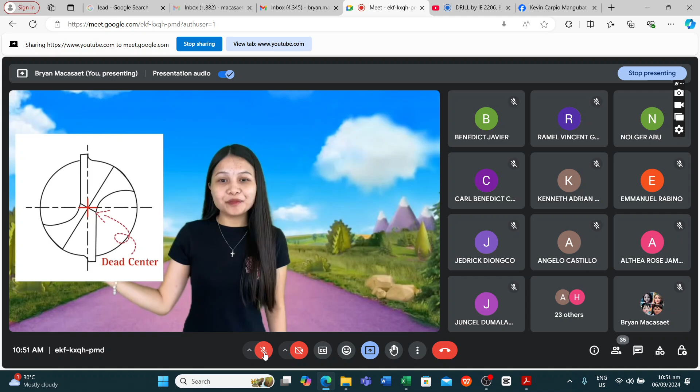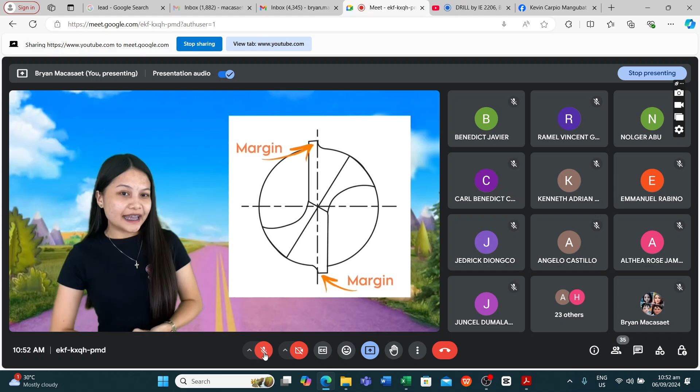The dead center is the sharp tip edge at the end of the drill, always at the center. The point is the entire cone-shaped cutting surface. The heel is behind the cutting edge, and the lip clearance angle is behind the lips. However, the margin is a narrow strip along the flutes, ensuring the right hole size, while the body clearance is slightly smaller than the margin, reducing friction with the hole walls.

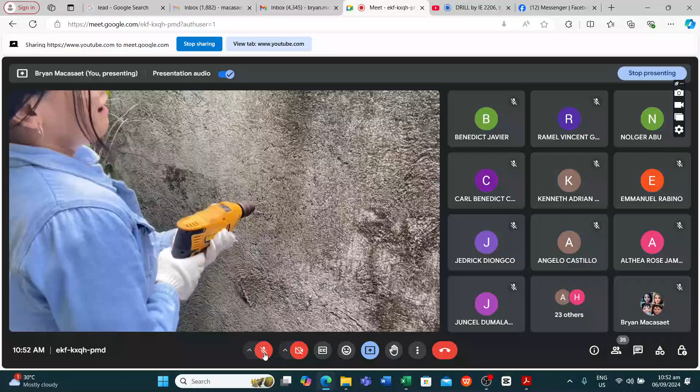Note that before a drill is used on any kind of work, it is important that it be correctly ground and sharpened. If a drill is not in proper condition for work, it will drill with difficulty, make a hole that is rough or off size, and perhaps break while in use.

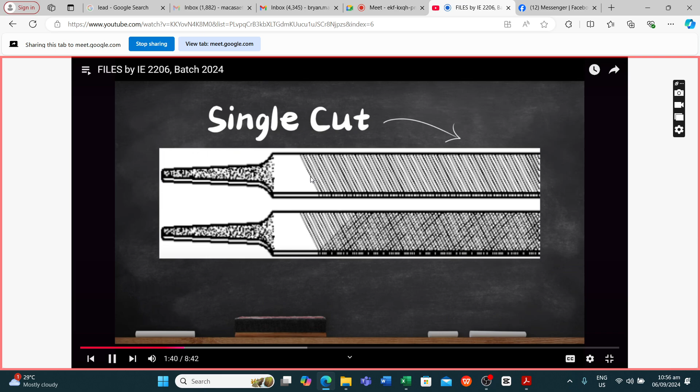Files have either single cut or double cut teeth. Single cut files have rows of teeth cut parallel to each other. The teeth are set at an angle of about 65 degrees with the center line. This is also used for sharpening tools, finish filing, and draw filing.

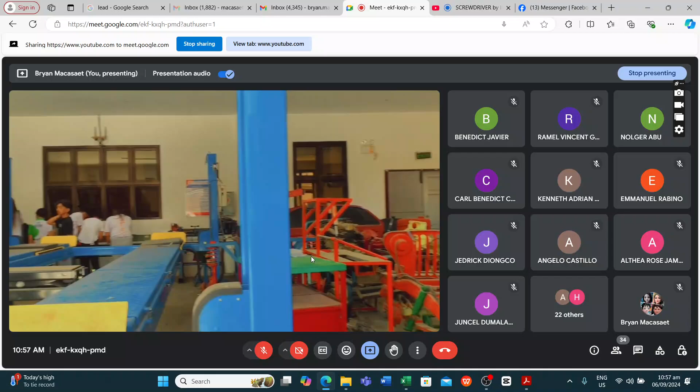Are you guys ready? Because we are now about to embark on a journey through the fascinating world of screwdrivers. Before we delve into their unique traits, let us first understand the parts of a screwdriver.

The body is the main handle of the screwdriver, providing grip and control during use. It's typically crafted from sturdy materials like plastics, rubber, or metals for durability and comfort.

Next, we have the shank, a long slender shaft that extends from the body to the tip. The shank comes in various lengths and diameters to accommodate different screw sizes and applications. Lastly, we have the tip, the business end of the screwdriver responsible for engaging with the screw head. The tip can vary in shape and size depending on the screw type it's designed to work with.

Now that we understand the components of a screwdriver, let us explore the four main types and their unique attributes, starting with the timeless classic, the standard screwdriver.

First up, we have the standard screwdriver, a timeless classic that's been a staple in toolboxes for generations. With its flat slotted tip, the standard screwdriver is perfect for driving screws with a single slot or groove. Whether you're assembling furniture or performing a basic repair, the standard screwdriver is always ready to lend you a hand.

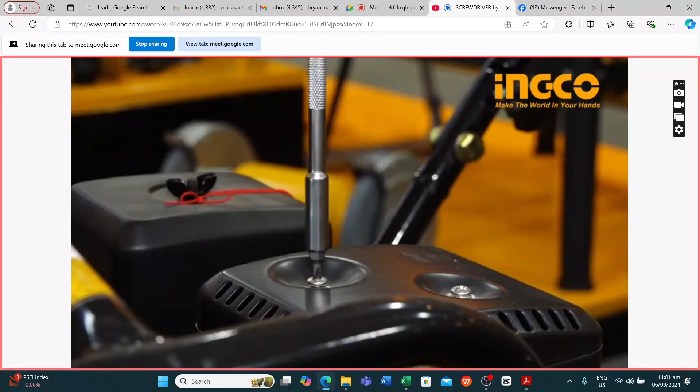Last but not least, we have the ratchet screwdriver, a hand tool that combines the convenience of a screwdriver with the efficiency of a ratcheting mechanism. It is used to drive or remove small screws rapidly. With its reversible ratchet action, the ratchet screwdriver enables you to tighten or loosen screws with minimal effort, making it ideal for repetitive tasks and tight spaces, and it's a useful tool for mechanical work and home repairs.

And there you have it, the four, each with its own unique features and benefits. So whether you are a professional or a DIY enthusiast, understanding the different types of screwdrivers and their components helps you choose the right tool for every job.

Okay, so that is the additional input for screwdrivers. From the video presentation, it shows, explains, and describes what is a flat or standard screwdriver, the Phillips screwdriver, the offset screwdriver, and the ratchet screwdriver. Okay, so next we have another presentation for shears.

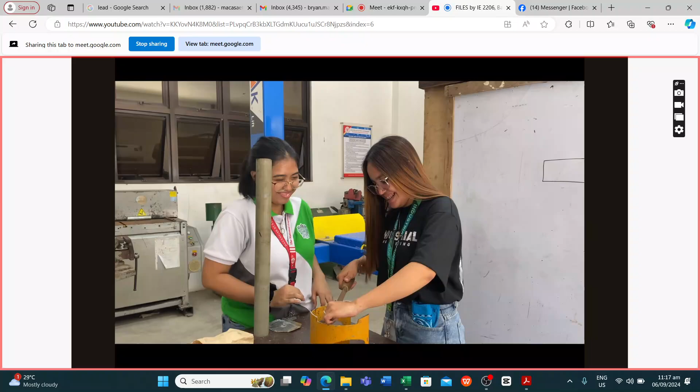Okay, so that is files. May mga part kasi na mute doon sa mga sound effects na ginamit nila. At kapag in-upload sa YouTube, yung mga copyrighted background music at saka songs ay natatanggal.

Okay, so can I call Ron Kilio Jake for the evaluation of the video presentation? Jake, Ron Kilio. Nasa si Jake? Wala.

Okay, next we have Relativo, John Lester. Evaluation of the video presentation.

Pakilaksan ng boses. Lester? Rinig po ba, sir? Yeah, sige. Okay.

Wait lang po, sir. Ano nga pong tanong niyo po, sir? Evaluation of the video presentation.

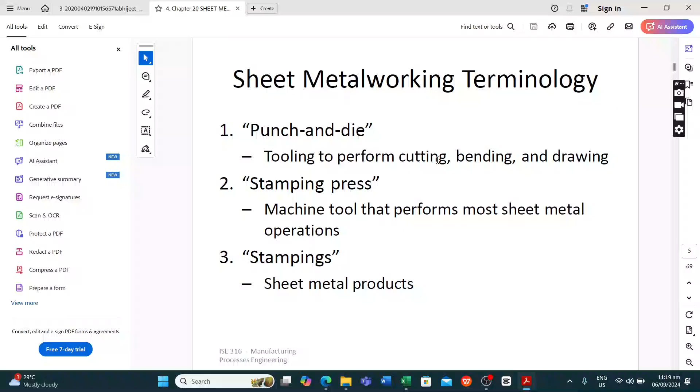Sa files po nga, ano? May iba't ibang difference po ng files. May square file, triangle, round file, knife file, flat triangular file.

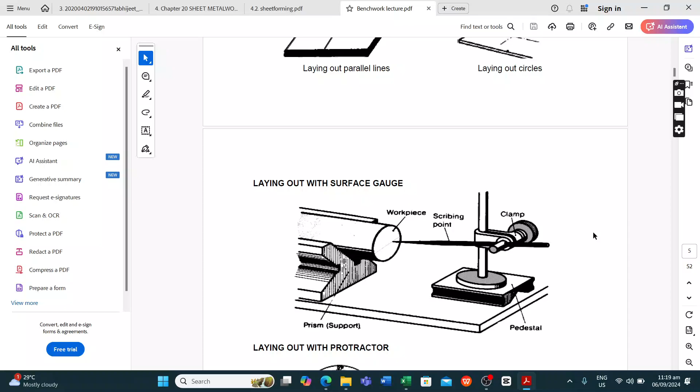Okay, so and then ano pang pinakita doon? Tsaka yung kung paano po siya gamitin. Ang paghawak po is dulo sa dulo, tsaka 30 to 40 lang po ang kailangan dito. Okay, so thank you.

Tama si Mr. John Lester. And then I'll be showing you an additional input.

So kanina na-presenta naman tong mga to. Tingnan ko lang kung minalikdangan ako. So lahat ng pine-present is part of a bench work. Pag sinabi nating bench work, it is a type of activity na ginagawa in a bench, and then it refers to a job that is completed at a stationary setting.

And then meron tayong carpentry and then hand tool. Idagdag ko lang yung safety, hindi natin na-discuss kanina. So when we work with shop, we must always recognize and be aware on the do's and don'ts na kailangan natin gawin at hindi kailangan gawin sa loob ng shop. Una, recognize safe and unsafe work practices in a shop.

Wala ba yung presentation? Ayan. So ibig sabihin, kapag alam natin na tayo ay pwedeng mapahamak, huwag natin gagawin. Second, perform your job in a manner that is safe for you and other workers and develop safe work habits. Develop responsibility for personal safety and safety of fellow workers. Think safely and work safely at all times.

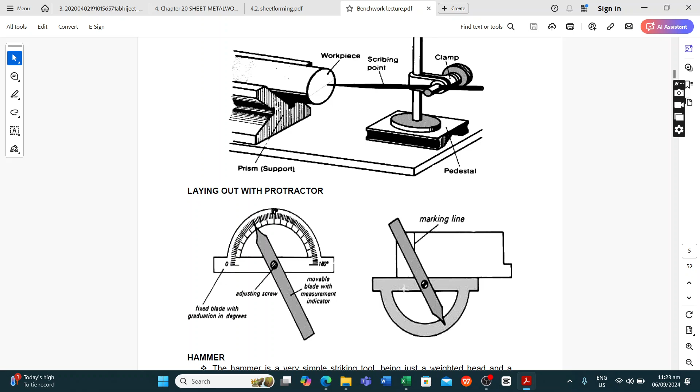Ito, na-discuss na naman natin to, yung mga laying out tools, etc. So tapos na tayo dyan. Yung procedures, napakita na rin naman sa video presentations yung iba. And then, hammer. Na-discuss na rin yan, yung mga types ng hammer, ball peen, straight peen, cross peen, claw hammer, sledges, and then, punches.

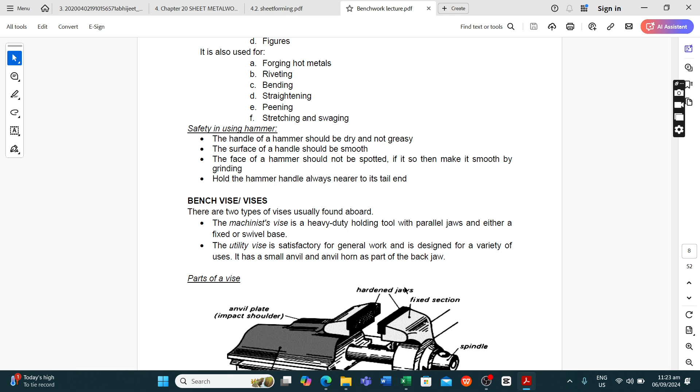Bench vise, hindi pa. So later on, edi papakita clamps, wala pa rin. Screwdrivers, tapos na tayo. So we have the standard, we have the offset, we have the Phillips and the ratchet.

Punches, ito yung diniscuss kanina. So it is a tool for stamping, perforating. Meron tayong center punch, and then meron tayong prick punch. We also have the starting punches, pin punches, aligning, and hollow shank.

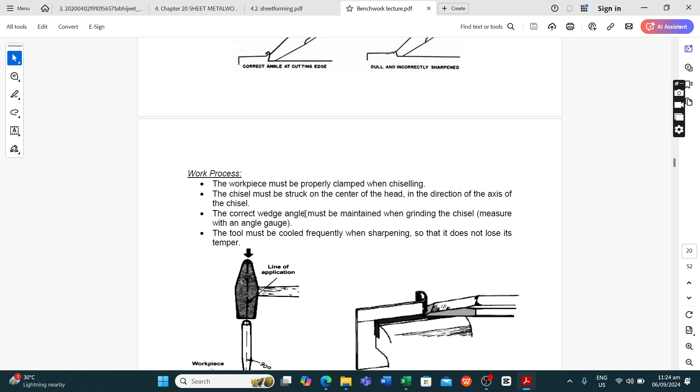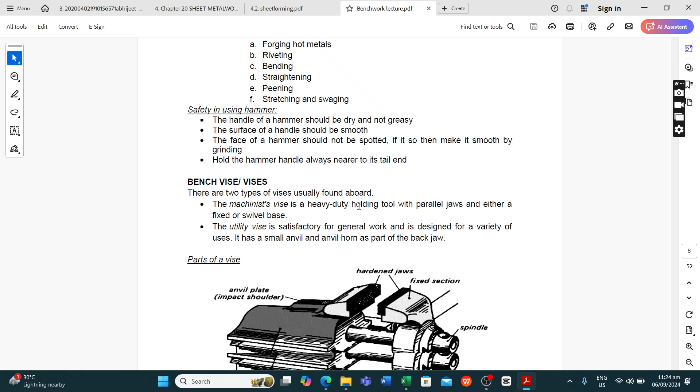Hacksaw, yan. Papakita ko muna and then mamaya ko i-discuss. We also have chisels, okay? Napakita na din sa video yung chisels. Okay, so next. Ang hindi ko pa na-discuss ay, after ng hammer, ay bench vise. Okay? So may video ba tayo sa bench vise? Okay, let's see.

Okay, so we have a video presentation for the bench vise. There are two types of bench vise: the machinist vise and the utility vise. The machinist vise is a heavy-duty holding tool with parallel jaws and either a fixed or swivel base. The utility vise is satisfactory for general work and is designed for a variety of uses.

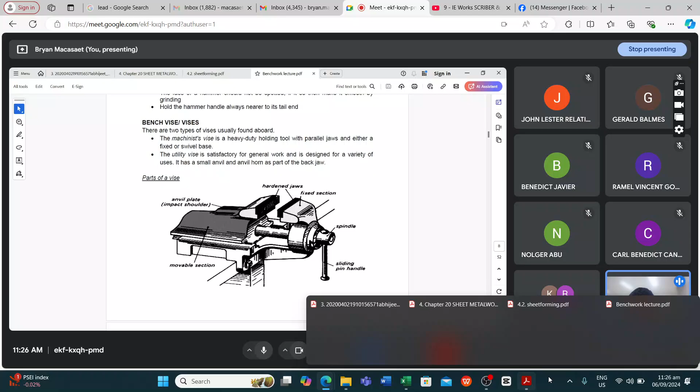As you can see in the picture, those are the typical components of our bench vise: the movable section, anvil, hardened jaws, fixed section, spindle. In Tagalog, what do we call bench vise? Gato, very good. I'm sure everyone has seen a gato before. Okay, this is our machinist vise.

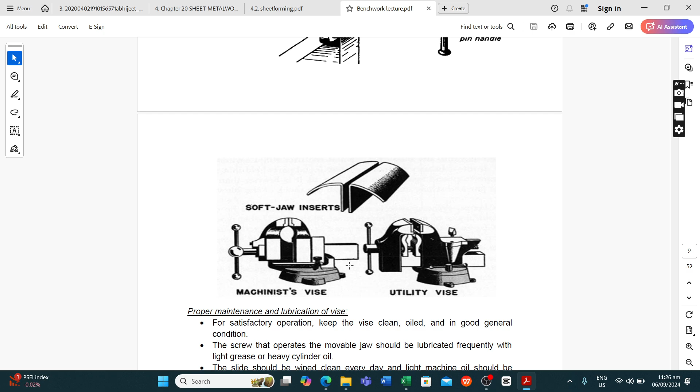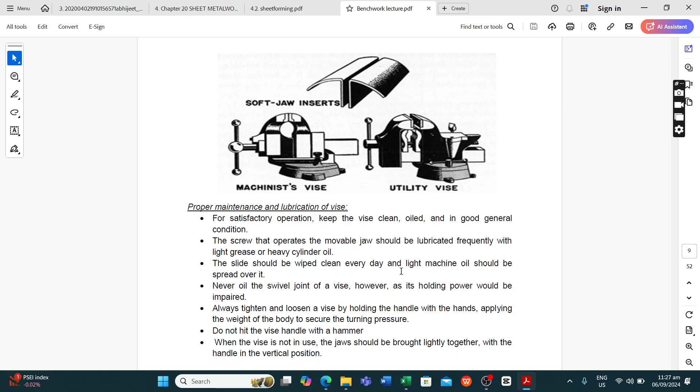Now we have the do's and don'ts. For satisfactory operation, keep the vise clean, oiled, and in good general condition. The screw that operates the movable jaw should be lubricated frequently with light grease or heavy cylinder oil. The slide should be wiped clean every day and light machine oil should be spread over it. Never oil the swivel joint.

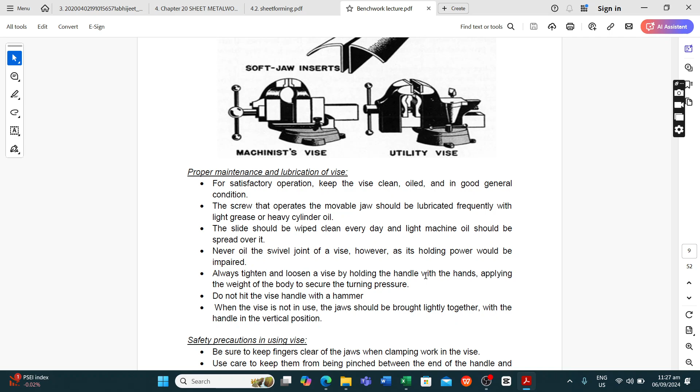Okay, you know the swivel. Where is it? Never oil the swivel joint of a vise, as its holding power would be impaired.

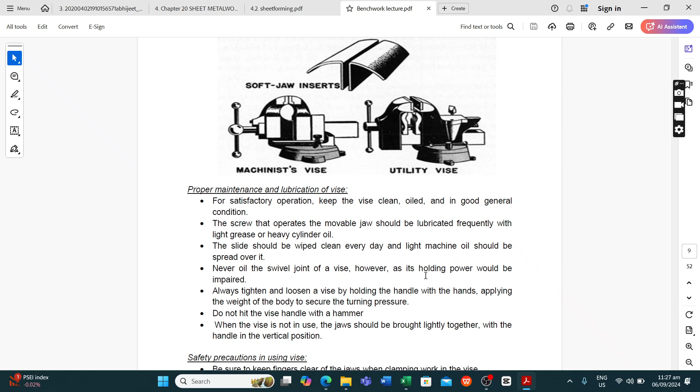Always tighten and loosen the vise by holding the handle with the hands, applying the weight of the body to secure the turning pressure. Do not hit the vise handle with a hammer. When the vise is not in use, the jaws should be brought lightly together with the handle in vertical position.

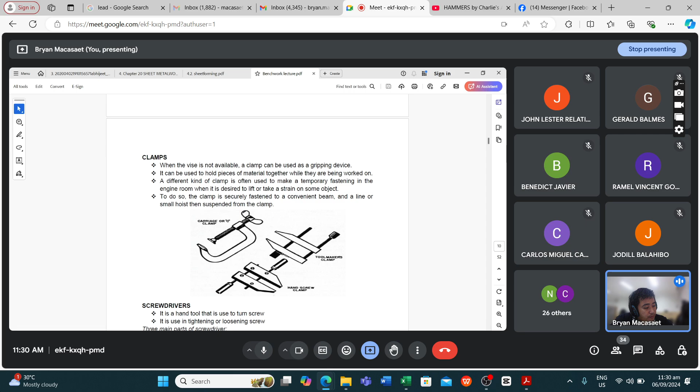So when we say clamp, this is something used to hold parts together, pangkapit. When the vise is not available, a clamp can be used as a gripping device. Remember earlier when we were cutting the sheet metal, that thing clamped onto it so it wouldn't move? That's called a clamp or C-clamp. This is the most common C-clamp.

It can be used to hold pieces of material together while they are being worked on. A different kind of clamp is often used to make a temporary fastening in the engine room when it is desired to lift or take a strain on some object. To do so, the clamp is securely fastened to a convenient beam and a line or small hoist is then suspended from the clamp.

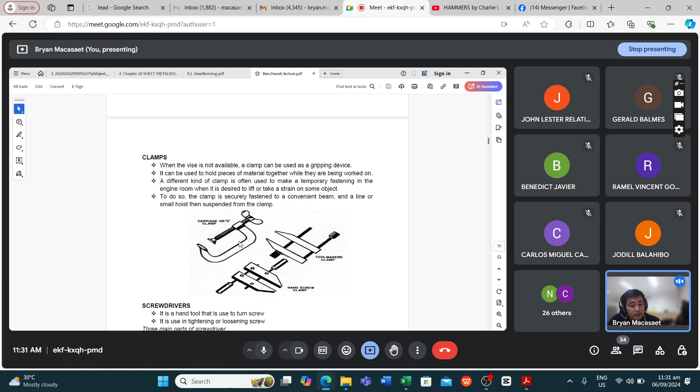Next we have pliers. Let's see if we have a video on pliers. Okay, we do have a video on pliers. Let's watch this.